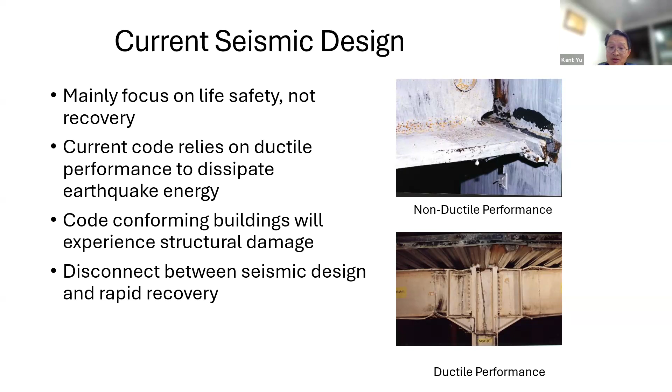So let's quickly talk about the damage states if we follow our building code design, right? In our building code, when we design, we have risk category 2. That's when we typically design office buildings, and category 4 is when we are dealing with hospitals, fire stations, police stations, EOCs, emergency operations centers, right? And then there's also category 3, when we design schools, power generation stations, water and wastewater treatment facilities. So what does that mean?

Well, when you design for category 2, what you're getting essentially after a design earthquake is life safety performance. That means the building is going to experience significant damage. The building may experience permanent drift. The building will remain stable and has reserve capacity so that occupants can get out of the building safely, but the building may not be economically repairable. That's called life safety performance.

And then there's operational performance at the very top. From the structural perspective, the performance level is called immediate occupancy. This building essentially retains most of its pre-earthquake strength and stiffness, and it remains safe to occupy. Any repair will be relatively minor.

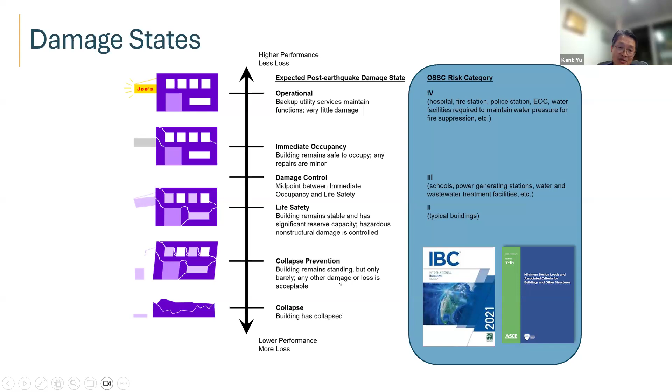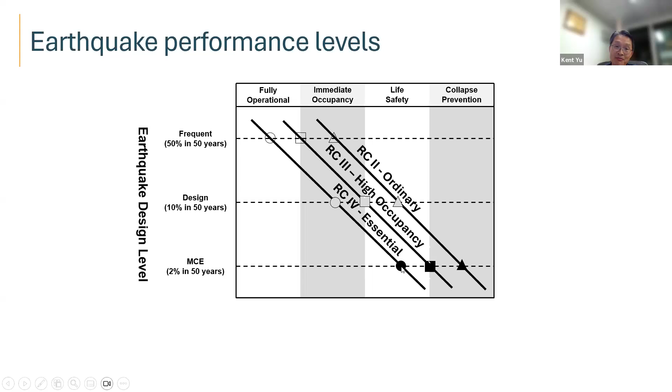If you design risk category 4, you're going to meet operational, structurally immediate occupancy, and at the MCE level earthquake, you achieve life safety. That's the performance level we're talking about.

Well, if you're using a life safety consideration, you would design the parking garage for life safety performance because that's risk category 2. But if you think about the performance of this garage in a post-earthquake scenario, you want to continue to bring patients and drop them off at the hospital. So you're going to park your vehicle on top of the garage.

If you think from that perspective, you want to design your parking garage to achieve the immediate occupancy performance level. The good thing is the building owner recognized this, and they are in the process of retrofitting this parking garage right now. So I want to show you the difference between the traditional life safety-based design versus recovery-based design. This is a big shift for us.

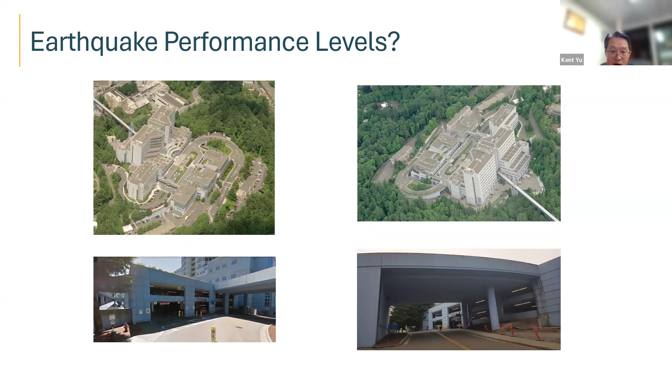So shifting from life safety to resilience, looking back, I would say the main turning point is 2006 in San Francisco, the 100-year anniversary of the San Francisco 1906 earthquake. Chris Poland of Degenkolb, the CEO at the time, was the chairman for the conference. He was working with Governor Arnold Schwarzenegger.

During that conference, they were talking about what if San Francisco 1906 happens again? How long will it take San Francisco to recover? So they started looking at what's called the Resilient City Initiative. This is where I learned the resilience concept from Chris Poland. Of course, many others in our state, Yumei, Jay, Ted Wolf and others, were also exposed to the resilient city concepts in San Francisco.

Yumei, Jay and Ted Wolf in 2011, right before the Tohoku earthquake, a year after the Haiti earthquake, wrote an article in The Oregonian, and they demonstrated strong leadership to move our state forward thinking about resilience. How can we make our state resilient?

Shortly after the 2011 Tohoku earthquake, our state passed House Resolution 3. For the state of Oregon, this is a turning point, shifting from life safety-based design towards recovery or resilience-based design. In Resolution 3, our state directed the Seismic Safety Commission to protect life and also keep commerce flowing. That means we want to use life safety and economic protection to drive our state's recovery and resilience plan.

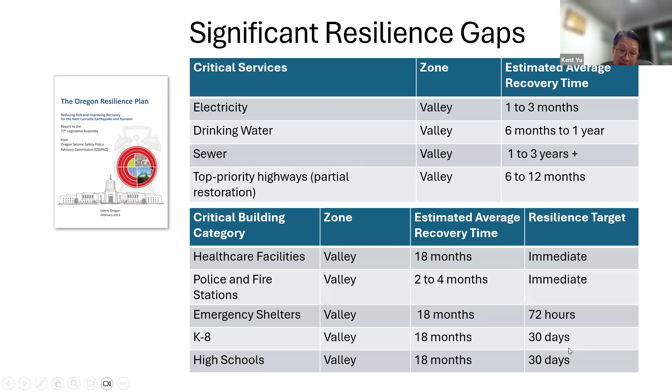We discovered a huge resilience gap for our buildings and infrastructure systems. The reason I'm showing this slide is because I'm going to use this a little later, especially talking about the schools and the emergency shelters. The target for emergency shelters is 72 hours. Right now, it's going to take us 18 months to recover. With K to 12 schools, essentially our resilience target is 30 days, but it's going to take us 18 months to get there.

So after we published the Oregon Resilience Plan in 2013, in 2014, NIST noticed the work going on on the West Coast, San Francisco, Oregon, and Washington, and then they wanted to also develop the community resilience planning guide across our nation for multi-hazard. Jay Wilson and I were involved in this work, and later on, Jay Raskin was leading the effort to develop this community resilience panel for NIST at the time.

So the work done by NIST was excellent. I think because you are all architects, I'm sure you love this. They're talking about the community. When we build our buildings and the infrastructure systems, we build these things for our people, and we need to meet our people's needs. So, what is the best way to define the needs for our people? I'm going to use Maslow's hierarchy of needs to talk about the community member needs.

So the most fundamental need is called survival, right? We're talking about water, wastewater, shelter, clothing, air, etc. Once we meet these most fundamental needs, we'll move to the next level. It's essentially safety and security. We're talking about personal and financial safety, security, economic, financial security, and health, well-being, and all of those things. The next level up is a sense of belonging and acceptance by your community.

So to give you an example, if you follow the matrix from the NIST Resilience Planning Guide, you'll have those critical facilities, emergency housing, those that take care of the short-term needs, and then housing and neighborhoods. That's to take care of the needs during the intermediate phase, and the community recovery is more or less what we're talking about in the long-term phase. So in the short-term phase, we need to have all these critical facilities ready to provide services, and then for the housing, typically we're talking about 2 to 4 weeks or so, and in our neighborhoods, weeks to months, to take care of our social needs.

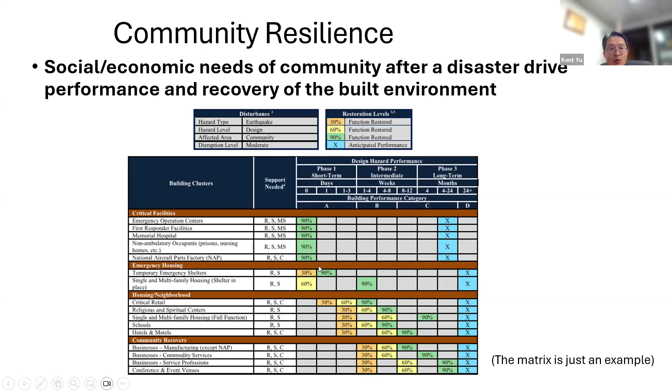But the thing is, our building life safety design standards do not address, in an explicit format, support for community resilience, which defines those recovery goals for our building clusters. So in 2018, the Congress passed the NEHRP, National Earthquake Hazards Reduction Program. In the 2018 law, the Congress heightened the focus on community resilience through the functional recovery of the built environment, buildings and infrastructure systems. So for the first time at a national level, we are shifting our focus from life safety towards recovery.

Traditionally we focus on life safety. Now we're shifting to functional recovery. I'll explain a little bit what that means. So after the earthquake, the first thing we want to do is stabilize our building so that we can reoccupy it. And then afterwards, we go inside the building to repair our structure to the extent that we can do most of the pre-earthquake tasks within that building. We call it functional recovery. Functional recovery is not full functionality. I want to make sure we are all on the same page on this.

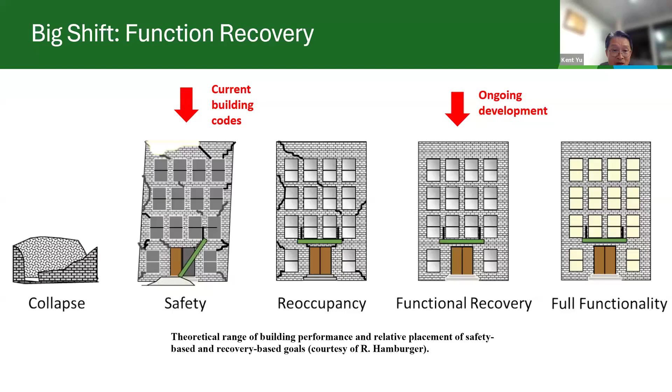So once we repair, we can achieve different recovery states, whether it's functional recovery or full functionality. Functional recovery, according to this FEMA report, is the post-event performance state in which a building is maintained or restored to support the basic intended functions associated with the pre-event use or occupancy of the building. Essentially, it's ready to support most of the pre-event use in addition to reoccupancy. So you can see that functional recovery is not full functionality. We may still have some windows boarded up. We may have limited use of our elevators. In certain locations, we may have to use a fire watch instead of having a fully functional sprinkler system, etc.

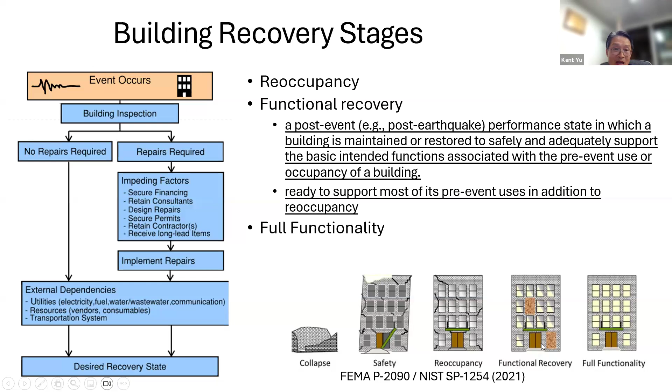So one of the recommendations from the FEMA NIST functional recovery report is that we need to develop a framework for post-earthquake recovery-based objectives. One of the conceptual categories developed in the report essentially is that we're going to look at our buildings based on when we need them, whether hours after the event, days to weeks after the event, weeks and months after the event, based on how soon we need those buildings.

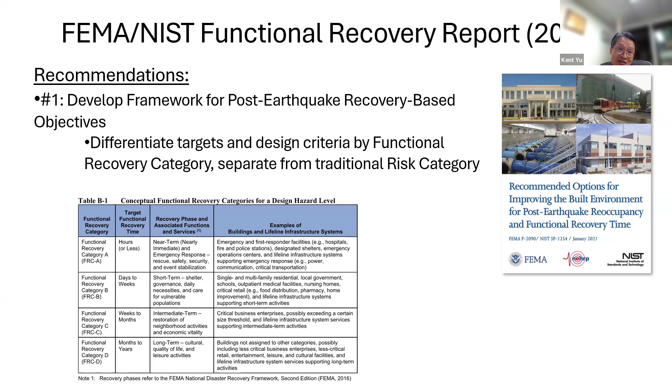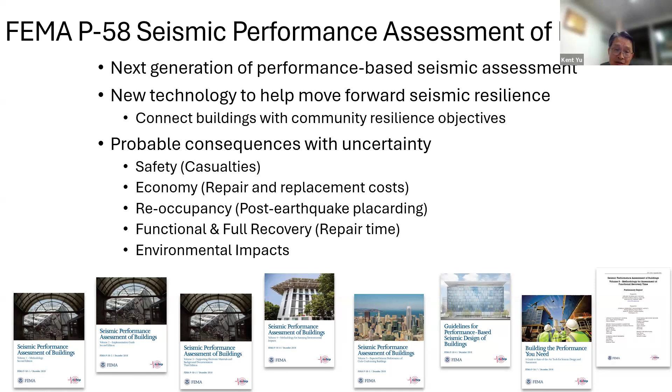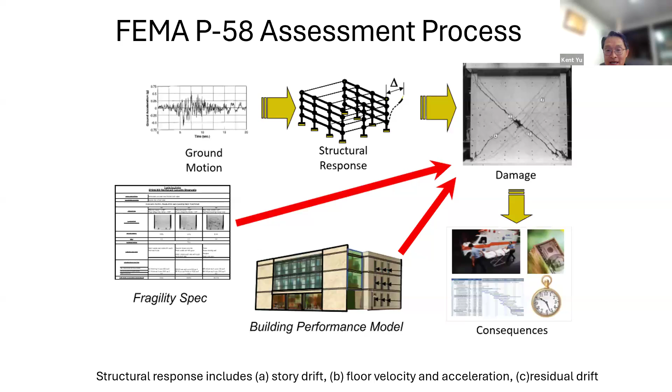Based on each component damage state, we can look at how much time it will take us to repair them and how much it will cost, then we tally them up. And that will get us the repair time, repair cost, etc. So all of this technology will be wrapped into the functional recovery design process.

In the United States, when we develop seismic design standards, the source actually comes out of NEHRP, the National Earthquake Hazards Reduction Program, passed by Congress in 1977. Over the past 40-some years, FEMA has been working closely with the Building Seismic Safety Council of the National Institute of Building Sciences to develop the NEHRP Recommended Seismic Provisions for New Buildings and Other Structures. Over the past 40 years, the Provisions Update Committee under the BSSC has developed 10 editions. Now they are currently working on the 11th edition.

Once the seismic provisions are developed, they feed into the ASCE 7 seismic subcommittee, which turns them into national standards referenced by the International Building Code. So the timeline is this: for the 2025 NEHRP seismic provisions, the committee was formed in 2021. Because of the FEMA NIST functional recovery report, FEMA asked the BSSC to form a task committee to address functional recovery provisions development. So there are 5 technical subcommittees working on that.

Next one I want to talk about is Oregon Resilience Buildings. This is the project I worked on with Yume Wang and state architect Alice Weevil. So after the Beaverton School District work, the state government, DAS, was very interested in what we were doing with Beaverton School District. During that time, our state government was very proactive. They wanted to also assess the anticipated recovery time for our state office buildings, our government buildings.

As you know, after the event, we need to maintain the continuity of government for our state. It is very, very critical. That needs to be up and running after a few hours. So in 2008, the state did a master planning for the yellow lot and red lot right across from the state capitol, in the state capitol mall. If you go to the state capitol for meetings, oftentimes that's where you park your vehicles.

So in 2008, they wanted to put an office building here with an underground parking garage. For the red lot, they wanted to put surface parking over there. That was the idea. So then in 2016, DAS approached us, mostly Alice Weevil, the state architect, and Yume Wang. So we were having a meeting talking about what their vision is for their buildings.

The vision essentially is operational within hours after an earthquake, operational after a 500-year flood. Because we know that the Salem infrastructure system is not up to snuff, we need to make sure the building can be operational off-grid 24/7. And then also they want to make sure we achieve the USRC, Resilience Council, Platinum rating. And also we need a sustainability rating of Gold minimum.

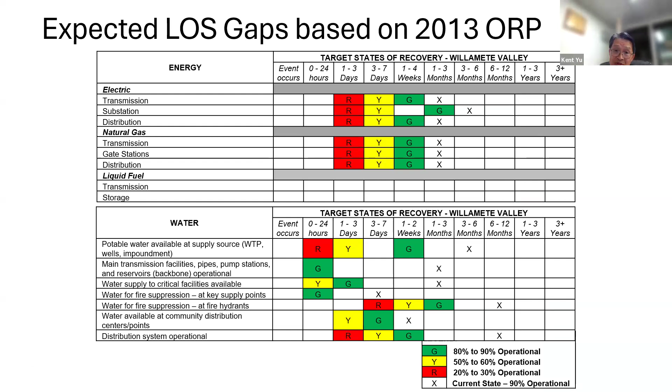So we mentioned about in the Salem area, if we look at our electricity, look at the natural gas, look at the water, wastewater systems, it's going to take us a long time to recover. So the state said we need to make sure the building is usable immediately afterwards. So we decided we want to make sure that the building becomes self-sufficient.

So for the red lot building, for the Oregon Resilience Building 1, to achieve that performance level, we decided to use base isolation, and also to support the building performance level, we want to do a really good job to brace all the non-structural components in our building, and to bring the water to our facility.

Well, in a normal mode, we're going to rely on the city water, but in the disaster mode, we have a well actually underneath the red lot. So we're going to use the well, pump the water to our building here. We can treat it in our building, or we can treat the water in the red lot building, in the parking garage over there. And also we can have an exterior hookup to bring the water into our building through a water truck. So we have a number of ideas to make sure we have a triple redundancy.

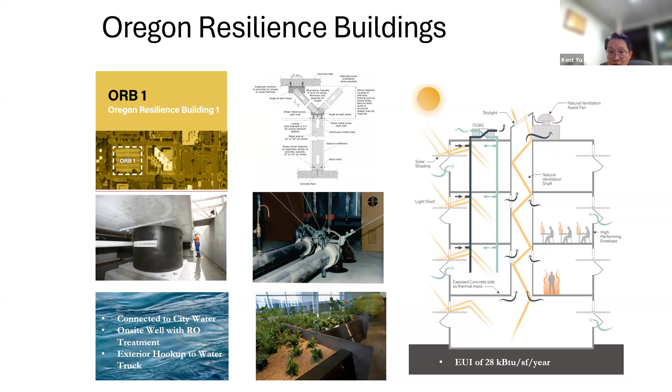And then for the wastewater, we want to treat the wastewater on site. And because we have base isolation, we have lots of space, especially in the basement area. So we're entertaining the idea of using a wastewater storage tank, buried underneath our building, maybe outside our building. But that was the idea, and we want to use passive design to make sure it's energy efficient. It's not only sustainable during normal time, but also it doesn't require a whole lot of energy consumption during the disaster mode.

Oregon Building 2 essentially is a parking garage. So then what we did was for the Oregon Resilience Building 1, we take the underground parking and put it on top of the Oregon Resilience Building 2. On top of that, we made the parking garage a little taller. And we make sure the building is going to perform really well. And also we want to use the building for multiple functions. We have an on-site well over there. We want to make sure that if needed, we can treat the water over there too.

But also we want to make sure we have a sufficient power supply for the Oregon Resilience Building 1. On top of both buildings, we want to put solar panels and also battery storage. But in Oregon, we have a few days that we don't have sun, so we decided to also have an emergency generator on site to cover some of those days.

So with those things, essentially we look at the cost, the cost difference between before and after. We're looking at somewhere around under 1%, in that range. So we definitely meet all the requirements posed to us by DAS.

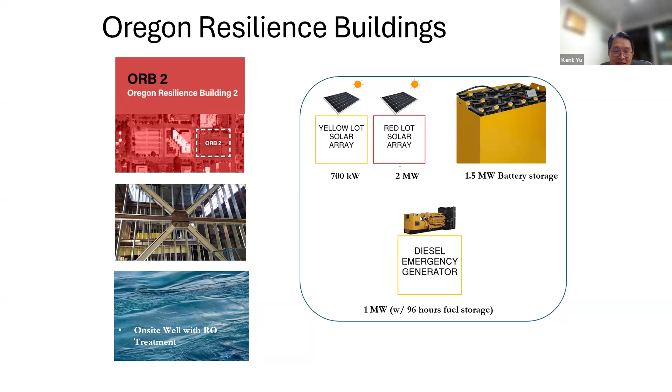In 2018, the state wanted to move forward with this, but because of the budget cut this project was paused. But during that time, Alan Scott and a few others were helping DAS move the project forward. And then Alan Scott was approached by the Oregon Treasury Resilience Building, the owner. Essentially, he was able to fold a lot of the resilience features into the Oregon Treasury Resilience Building. So all of our hard work didn't get wasted.

So Penske Construction was the general contractor. They knew our history with the Oregon Resilience Building, so they hired us to assist them during construction. They want to make sure that when they build the building, they get all the resilience features right. So what we did was we reviewed all the drawings. They have structural, architectural, mechanical, electrical drawings, and we identified all the key features, resilience features embedded in those drawings.

And we did a presentation to their Penske team. Penske Construction has many trades, subcontractors. We talked to them, brought them on board, explained to them why this building is important, the functionality of this building, what design details will support the functionality of this building. And when you do the actual construction, you'll need to pay close attention to those details. So we explained this to them so they have a really good understanding.

And then they also asked us to provide additional structural, non-structural observation during the construction process to identify anything that was missed by their contractor. So the whole process was really good, and that was a very unique experience for me actually. Previously, all the resilience planning work was done at the beginning of the project. This one's at the tail end of the project.